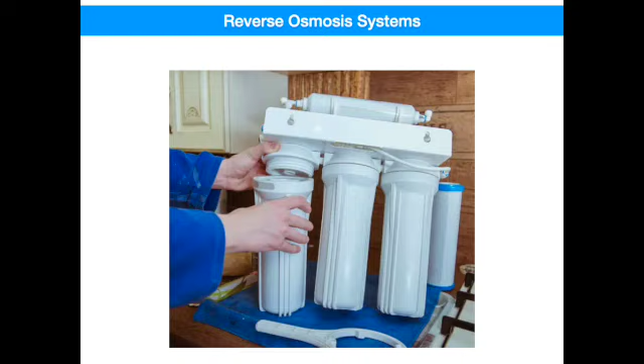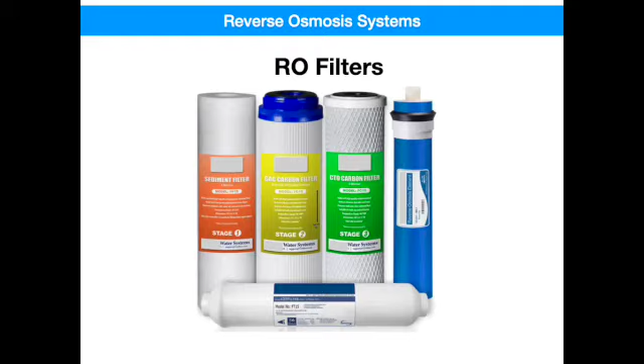Today we're going to discuss several misconceptions about reverse osmosis systems. I hear residents talking about replacing RO filters because the flow is getting weak. While this sounds like a logical solution, I will tell you that the three most common problems with RO systems have nothing to do with the filters, but it's the first thing that homeowners assume will solve their problems.

Now, normally I give you do-it-yourself instructions in my videos, but today we're going to be doing two things. We're going to discuss at a high level how an RO system works, and then we're going to discuss the most common problems that you'll see. Are you ready? Here goes.

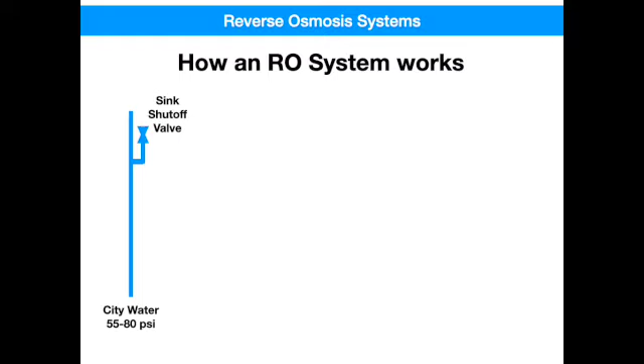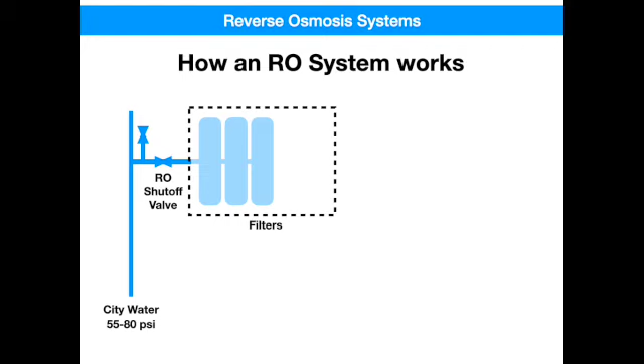First, water comes into your house at city water pressure, usually 55 to 80 psi. The reverse osmosis system taps into the cold water piping below your sink. In addition to the one for your kitchen sink faucet, there should be a dedicated shutoff valve just for your RO system. The water goes through lots of filters.

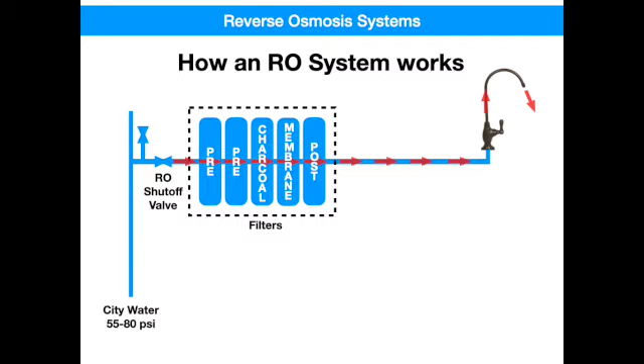You can get an RO system with 3, 4, 5, or more filters. There are pre-filters, charcoal filters, membranes, and even post-filters. Don't worry about those now. Just know that forcing the water through these filters takes a lot of pressure. In fact, if this was all there is to the system, this is how fast the water would flow out of the faucet, and nobody has patience for that.

That's where a storage tank comes in. These tanks can store several gallons after the water makes it through all those filters. Not only do they hold several gallons of filtered water, but they build up pressure as they slowly fill. In fact, it's the storage tank that drives the water up and out of the faucet, not the water coming through the filters. To demonstrate, watch as I completely turn off the incoming water to the system and open up the RO faucet with just the storage tank in service.

Whether you have brand new clean filters or years old dirty filters, the pressure and volume of water you get out of your faucet is primarily based on the health of your storage tank, not your filters. Unfortunately, most people think flow problems must mean clogged filters, and that's what they tell the serviceman. And then he quotes you a price to replace perfectly good filters, and then he charges you extra to repair the tank, which was the problem all along.

Now, as I said, this is an extremely simplified description. In reality, there's several other components that can go bad. So let's talk about the three most common problems with an RO system, how to recognize them, and what can be done. And as I said earlier, none of them have anything to do with the filters. First, the most common problem is a continuously leaking drain line.

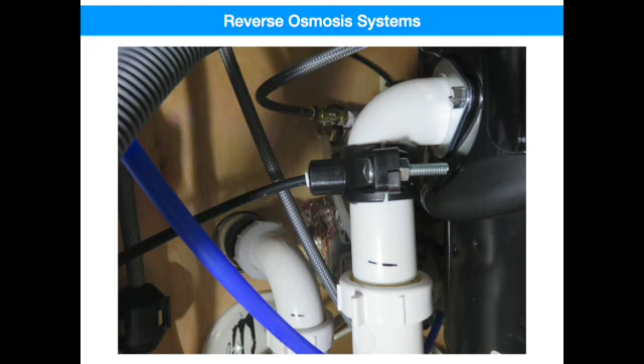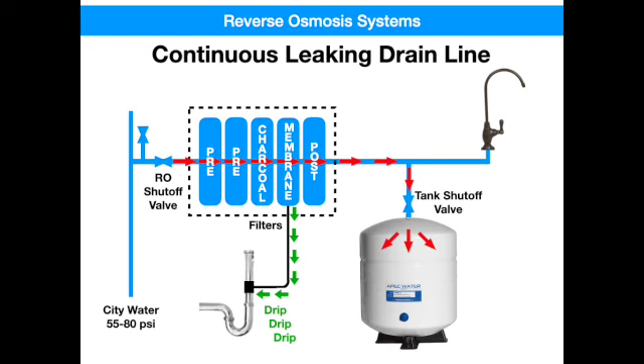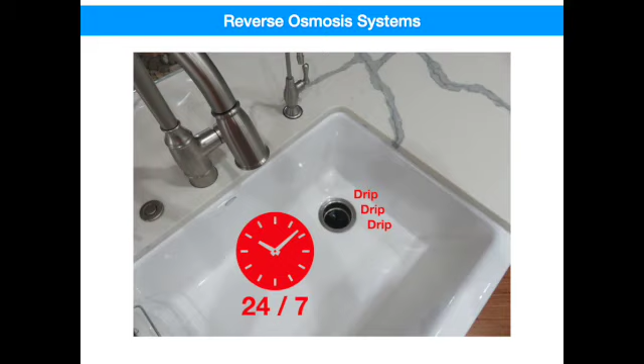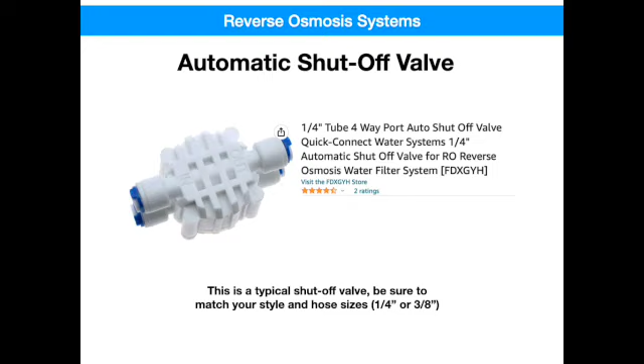Under normal operation, once the clean filtered water fills the storage tank, the system automatically shuts off and all water stops moving. During this filtering process, you may hear the discharging water dripping into your sink drain, and that's normal. What's abnormal is that the draining into your sink never stops. You can hear the dripping in the sink 24/7. This is a sign of a failed component called an automatic shutoff valve.

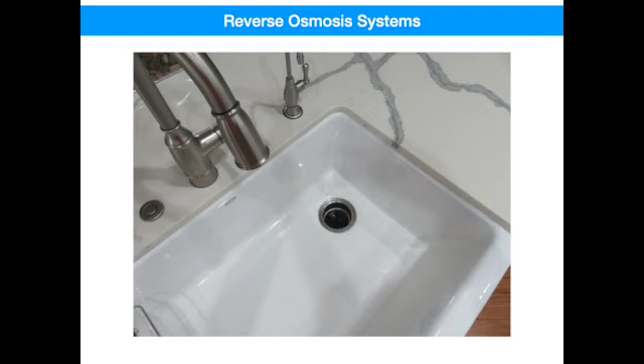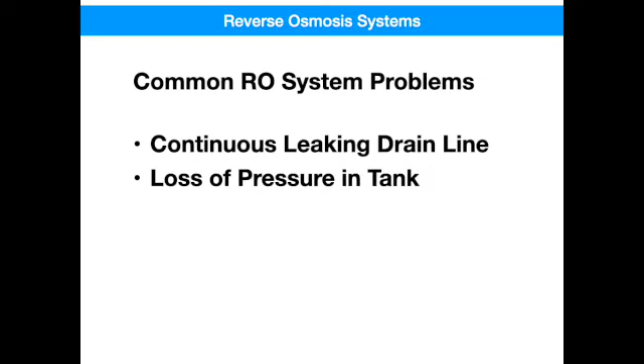Replacing this component will stop the excess dripping and will save you from wasting water. And the best part is that you can search and find it on Amazon, and it's usually under $10. So if it's been several hours since you last got water from your RO faucet, go listen at the kitchen sink drain. If you can still hear it dripping, you need to have your automatic shutoff valve replaced. You're wasting water.

The second most common problem is the loss of air pressure in your storage tank. Yes, I said air pressure. My RO tank holds about 3 gallons of filtered water, but the total volume of the tank is 4 gallons. So what's in the rest of the tank? Actually, it's an air balloon, or a bladder. Air is compressible, water not so much.

So as water enters the tank from the filters, it compresses the air in the bladder and causes a pressure rise. When the pressure reaches the design pressure, the automatic shutoff valve we discussed earlier senses this and shuts off all the water movement in the system. This pressurized bladder becomes the driving force to push the water up and out of your RO faucet when called to do so. Here's what the normal flow looks like when the storage tank is fully pressurized. I'm going to speed this up for you.

I'll go back to normal speed now. Watch for when the storage tank is fully drained of water. You'll see a rapid drop in flow. There. This slower flow rate now is purely the flow being pushed through the filters by the city water pressure after

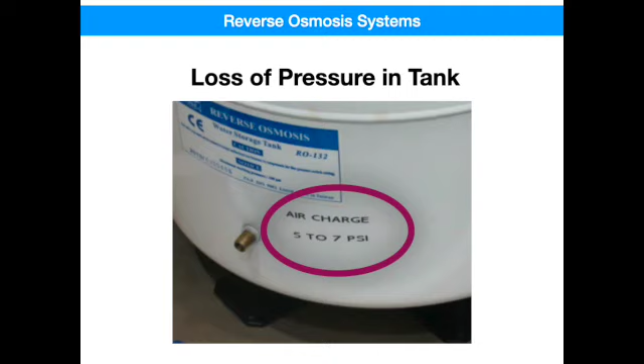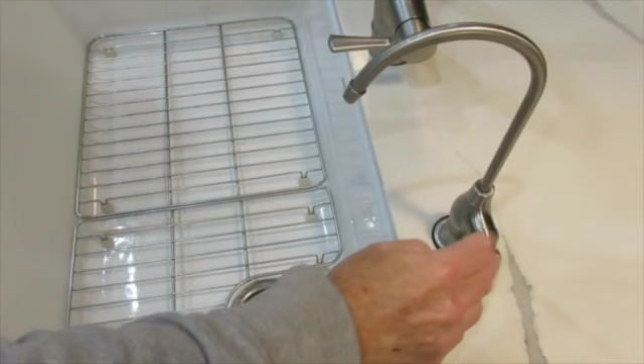So what does a bad storage tank look like? Most bladders have an air pressure rating when they come out of the box. Mine's between 5 and 7 psi. Yours might be slightly different. If it doesn't say on the tank, you can usually find it online by using your model number.

If the bladder air pressure is 0 pounds, this is what it looks like. Water flows strongly for a second or two and then quickly trickles. Here, if the air pressure is low, water flows moderately for a time and then trickles. The tank's capacity is never reached.

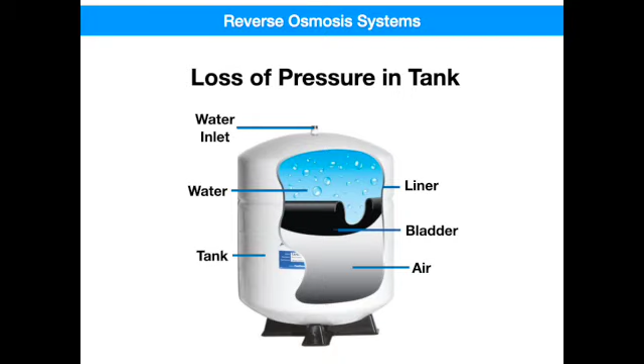And if the air pressure is too high, the flow will stay strong, but the capacity will be less because less water is allowed to enter the tank because of the high pressure. Too high of a pressure can result in the rupture of a bladder. If this happens, air may occasionally blow out the faucet and water will come out of the air fitting at the bottom when opened. If that happens, you're buying a new tank. But don't worry, most big box hardware stores have them on the shelves for about $50.

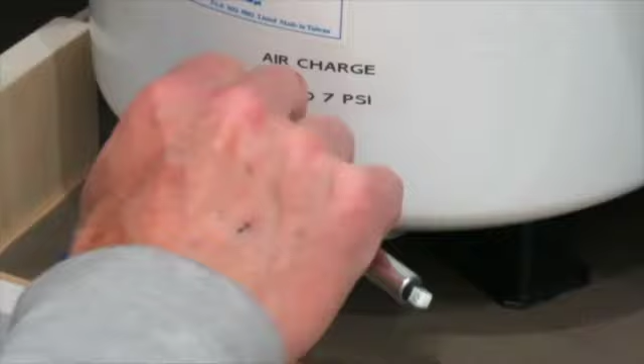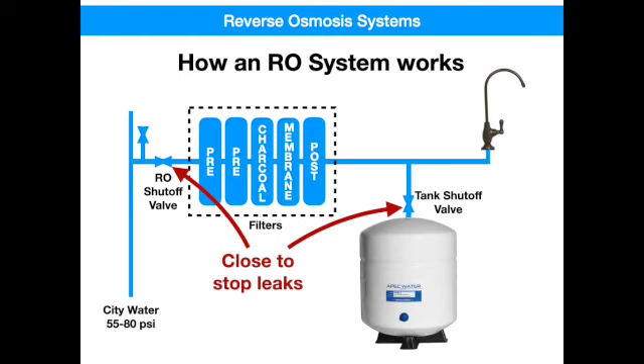Lastly, the third common problem are leaks. If a leak's coming from one of your filter housings or components, it's best to call a pro. To stop the water from getting all over, close the valve on the top of the storage tank and turn off the RO under the sink at the water shutoff valve. By the way, the use of water alarms is always a good idea. They've saved me a few times.

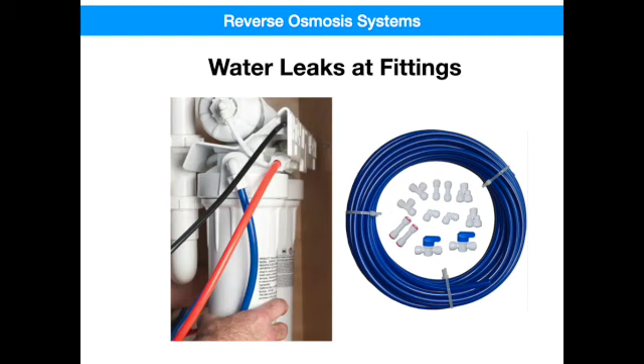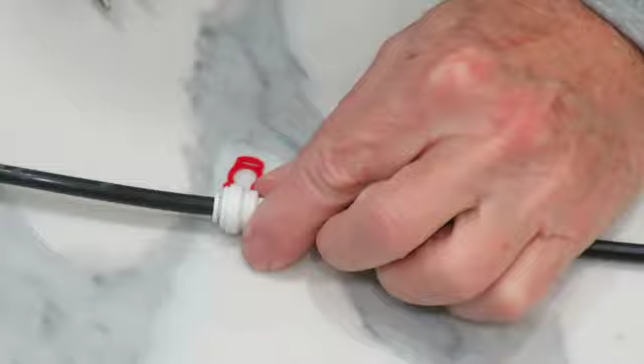If the leak comes from a hose connection, you may be able to easily fix the leak. ROs use 1/4 inch or 3/8 inch plastic tubes with either compression or quick connect fittings. Compression fittings may stop with a little extra snugging up. Plastic tubing that uses quick connect fittings can be taken out, recut, and then reinserted in a matter of seconds to solve the problem.

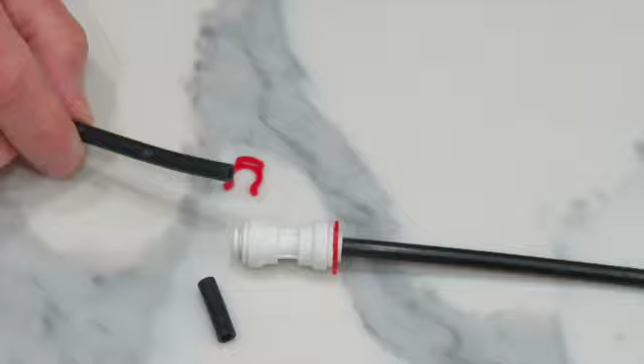Here's an example of a quick connect fitting repair. First, remove the safety collar, if there is one. Push the collet ring inward, and then wiggle out the plastic tubing. You can either replace the fitting or you may be able to fix the leak by just cutting off the tip of the tube and reinserting it again.

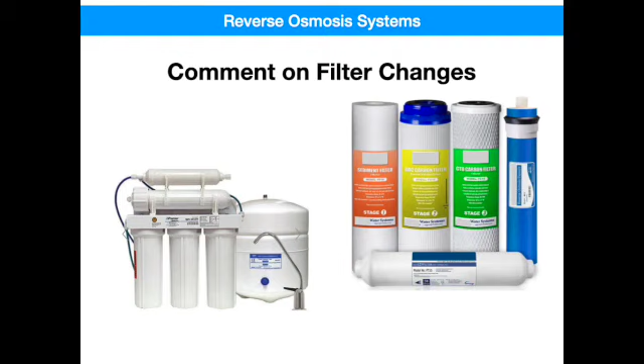Now, even though these are the most common problems observed on RO systems, it doesn't mean that you should ignore filters and the membrane completely. People who sell filters will tell you the sooner the better, but a fixed frequency doesn't fit everyone. Obviously, a family of 6 will need to change their filters sooner than a family of 2, and snowbirds may change them even less.

Your senses are always the best guide. Is the water cloudy? Does it have an odor? Does the tank take way longer than normal to fill? These are all signs that it may be time. And if you're going to go through the hassle of replacing the filters, replace them all, including the membrane. It's worth it.